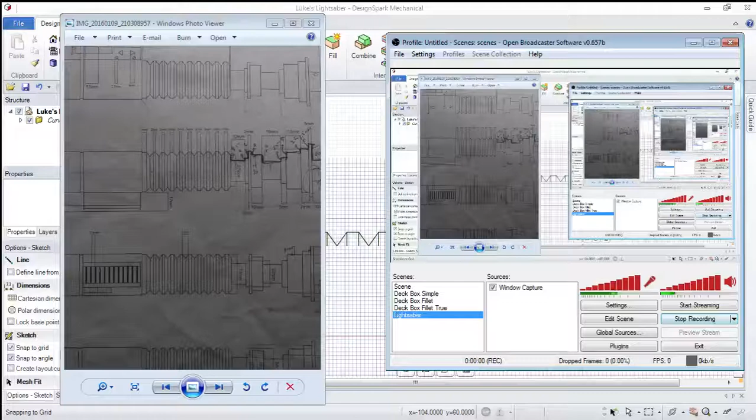Specifically Luke Skywalker's lightsaber from Return of the Jedi. I found the tech specs for several of the lightsabers from the movies. Luke's and Obi-Wan's were very symmetrical, so they're actually pretty straightforward. They look a little complicated, but we're actually going to nail this pretty easy.

I've gone ahead and started sketching it to save some time, but let me explain how we started this guy. So we took one of our cross sections here, and I cut it in half along the mid plane, all the way through, and then I started sketching the silhouette of it across where it is.

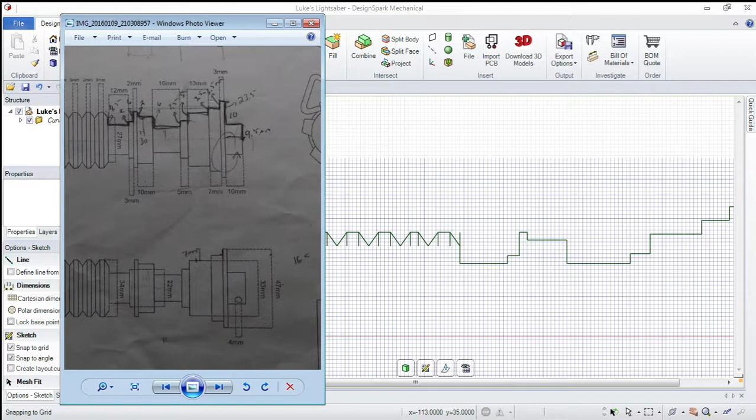So I had to start by looking up all the dimensions. You have to read a tech spec, or the technical specifications of one of these documents, and you're going to have to be able to look at where your dimensions are and be able to manipulate them as you need to replicate them in a thing, if you're doing your own project or want to adapt to one of the other ones.

So these are all in diameters, so I had to go ahead and cut them in half to get to radii, because we're dealing with radii here. And then I was subtracting radii from each other to get the differences here to go up.

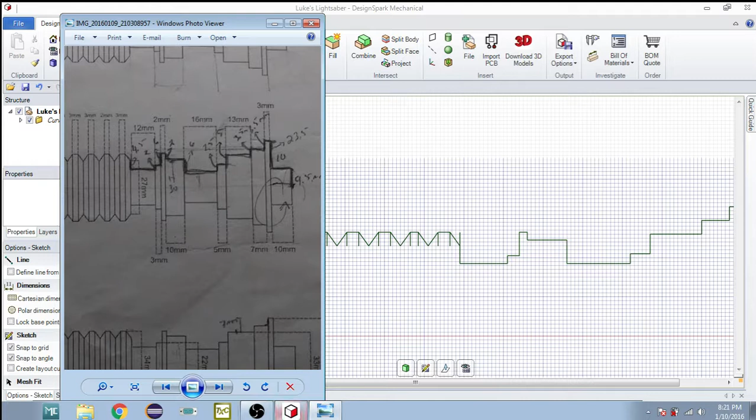All right, so I started down here, went 9.5 up, over 23.5 over, and kept going. And then I got to these guys.

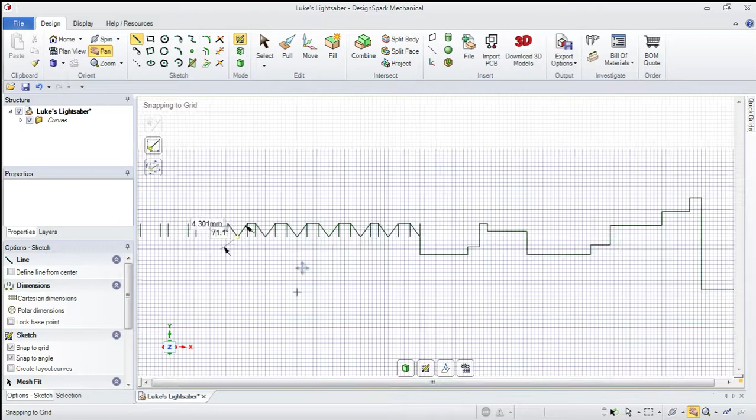These guys took a special little trick that I figured I'd show you while I was doing it, because this is the ribbed part here. I know that each little bar here oscillates between 3 and 2, and it changes as it goes. It's not very consistent, so you'll have to pay attention to that as you're going.

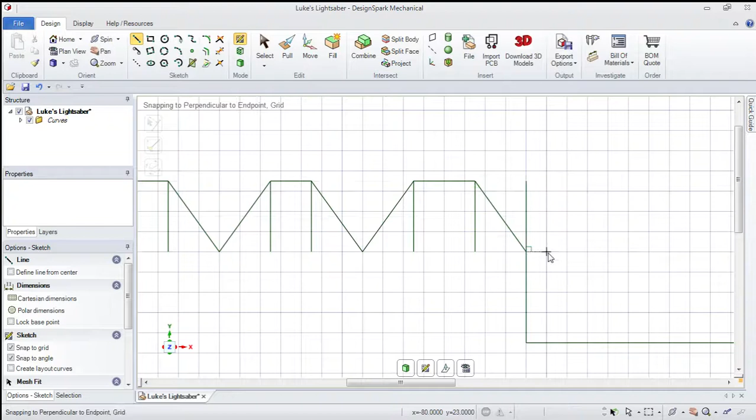So these triangle pieces here are 5 millimeters across total, and then I went and bisected them for the dip. So this first piece was 4.5 millimeters, and then this piece was 3.5, because the height of the ribbed gap here is 3.5 millimeters, and then 2.5 over. So 2.5 times 2 is 5, which is why I have the distance here.

So what I did was draw this guy first, and I offset him the distances, and then connected the dots. I offset him first 2.5 for the distance of only half a triangle, then 3 for the width of the first guy, because that's what he is. 3, and then 2, then 3, 3, 3, 2, 3, 2, 2.

So I then offset this guy 5, and then 2, 5, 3, 5, 3, 5, 3, and so on, all the way to the end here. And then I was connecting the dots as I went. Or sorry, I connected them after I finished the offsets.

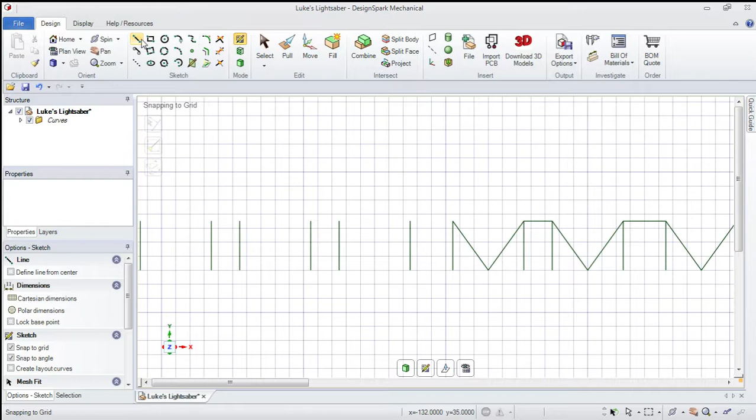So now I'm going to keep doing this. So 3, go down to the middle here, then I'll keep going. I will say that the whole lightsaber model is about a foot long, which is actually too long for our printer.

So there's actually, if you want a full scale, you'll have to cut them in a certain way to get it to fit on the printer, the printing bed, which is fine. I designed it a certain way for quick access, to do it, and I'll show you at the end.

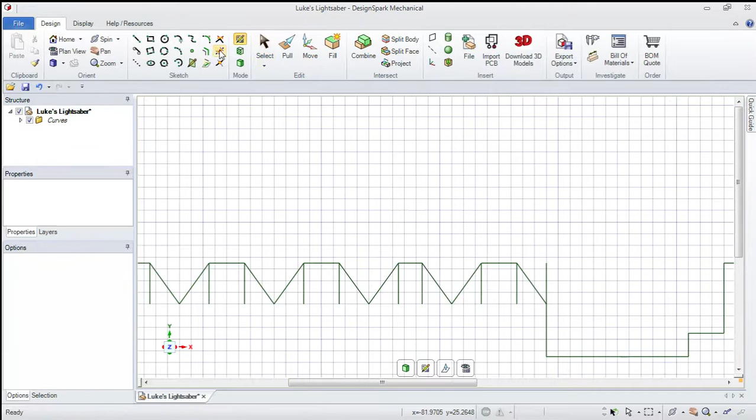So let's go ahead and use the trim function here to clean up, okay? Then we'll just go through and mop up all my little guidelines that I was using.

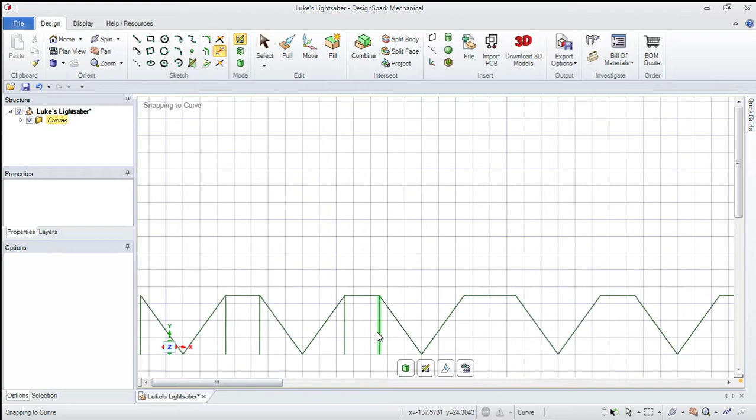Yeah, and because it's such a big print, it does take about 16 hours and about 40 minutes, I believe, to print off a lightsaber on the lowest quality setting of our printer. So I would suggest doing a scaled down one if you want a higher quality, more reasonable print.

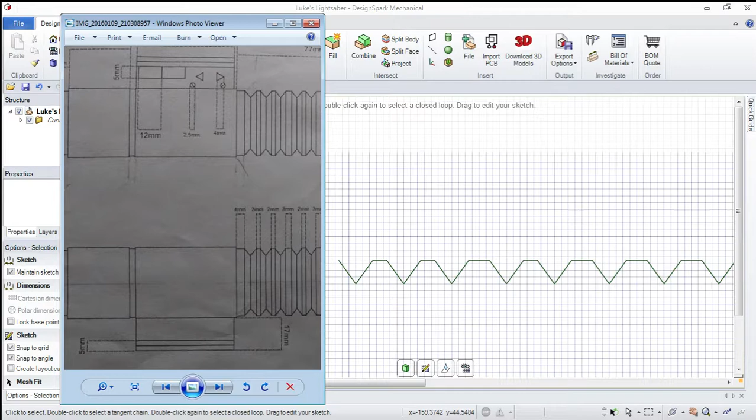Okay, now I'm bringing up our schematics here. I actually have, I've used them, you can't see them up here, but it's in one of my hands. This width here is 51 millimeters, and there's a little 2 millimeter gap for the button that goes up. And then, yeah, so let's start doing that.

So this first little piece here, though, is 4. Nope, it is 12. And then we're going to go up 4.5 millimeters. Then we go over 51. It's going to give us a good gap here. Then we're going to go down 0.5 millimeters. Go over 3 millimeters. Go back up 0.5. Go over, I believe, 31. Yep.

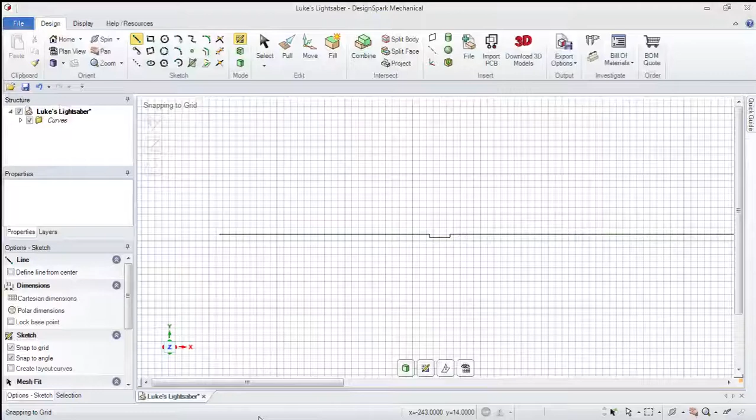If you're one of my viewers and you don't have one of these in front of you, I'm really hoping you can just pause to follow along with these schematics as we're going.

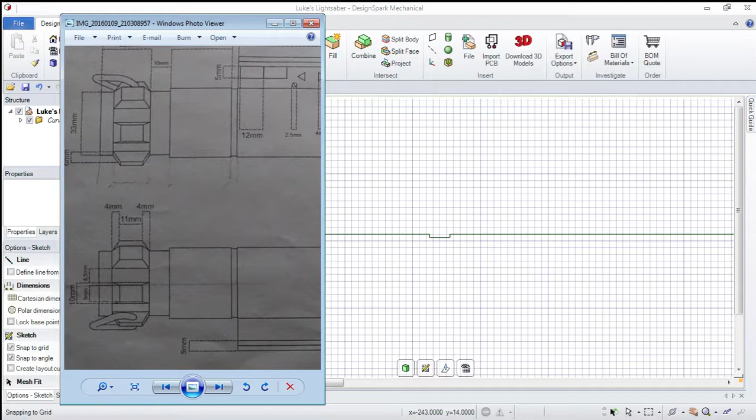So I've done 51, 3, 31. This guy here has the cool little trapezoid parts. I'm going to do the full width of the guy, which is 35 millimeters. Well, it's 25 for this piece and then 35 for that guy. So let's go ahead and do that.

So this goes down 1.5, and then over 35. Now we're going to go all the way down here, and then connect our guy. Now we have a full cross-sectional cut silhouette of our lightsaber guy.

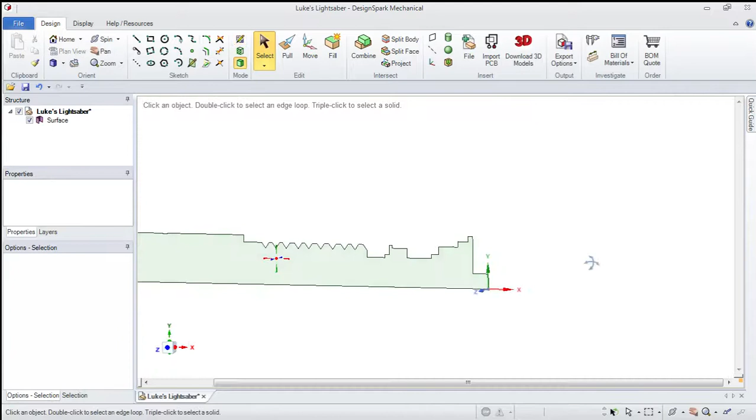Alright, now for the fun part. This is just a trick for really symmetrical things, where I can now enter 3D mode, take this surface, hit pull, and we're going to use a cool little function here called revolve around an axis. So we're going to revolve around axis, and then it has this little arrow guy pop on our thing, so we have to select an axis.

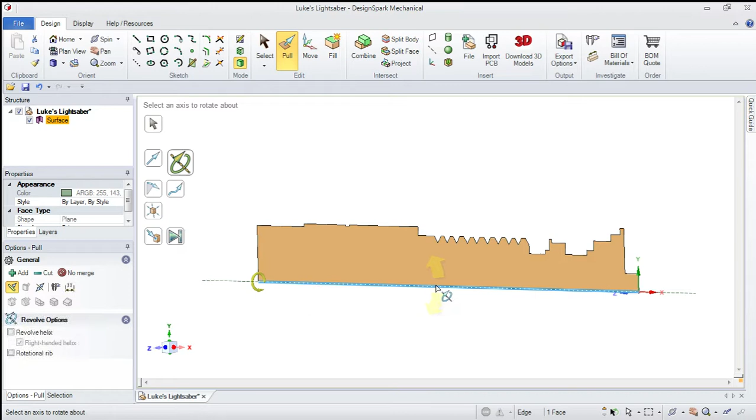I'm going to select this, the x-axis, because it happens to be our bisecting dude there. Select that guy. And then we're going to hit this guy and watch it happen. Full pull, which is going to revolve the whole thing in a full complete circle, 360 degrees. And we watch all the cool stuff happen.

Now we have a lightsaber, minus some of the fancy pieces. Let's go ahead and add some fancy pieces now. Let's do those trapezoid parts. So let me orient myself here.

Let's put a plane here. So I hit this plane, and then just kind of put it on the surface here. It doesn't particularly matter how you get it oriented, as long as we get it looking alright.

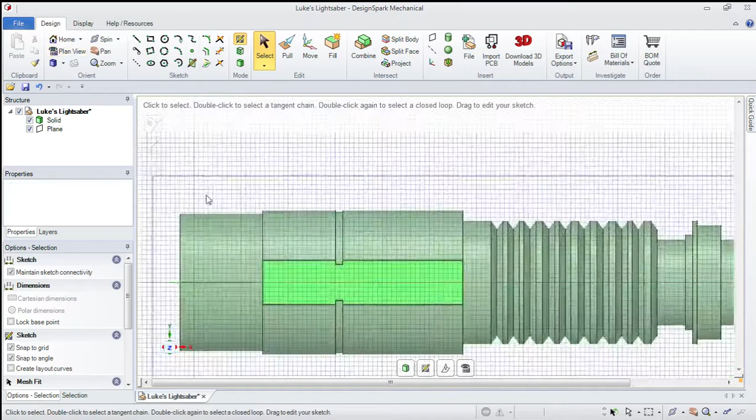So this plane cut off the part that goes above our plane so we can see where we are, which conveniently allows me to take the offset function here. And I'm going to control click both of them so they're both highlighted, so it lets me offset the whole guy. Remember, there was a distance of 10 millimeters before the trapezoid part started, and the trapezoid part itself is 19,

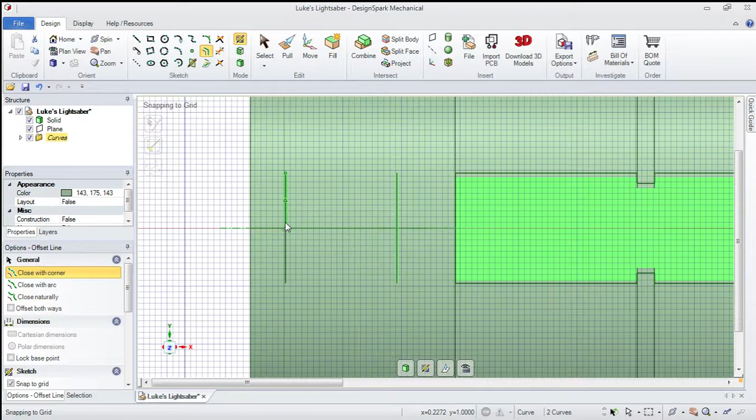hold on, make sure we select just this guy, 19 millimeters, and then there should be 6 right here. So now we've got the range of the length of our trapezoid.

Now I need the width, which is, if I look at my schematics, 10 millimeters. To do this, I'm going to take the offset, take the middle guy, and go up 5 on either side. So I took 10, divided it in half, and put it on both sides.

Okay, then we'll take trim, this guy here, and tidy this guy up. If I can click on them, get these guys. This line is going to stay there. It's a point of contact, so it's not going to go away.

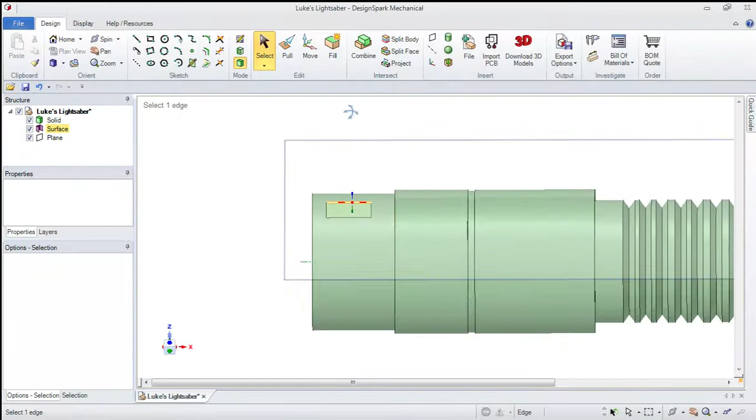Alright, it's not a trapezoid yet, so we gotta work on that. So let's go ahead and pull him up into a rectangular prism here for 6 millimeters.

Alright, now we're going to do a fancy pull function here on the edges. So if you click all these edges on the top here, and then click our pivot edge over here, this is going to allow us to shrink this top piece. Probably can't see very well, but the arrow pointing down there is highlighted, which means it would pivot along this plane, which just means it's going to slide up and down, which isn't useful to us.

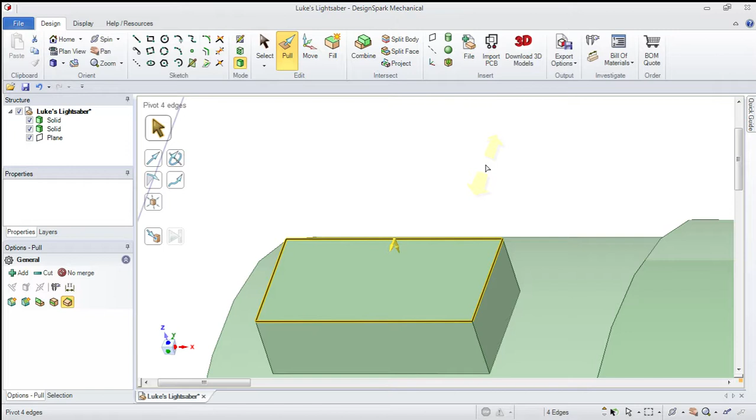So we're going to hit tab to highlight the next arrow, so it's going to pivot inside, internal. And I'm just going to type in 2 millimeters, because I was messing around earlier and I thought that looked cool. Alright.

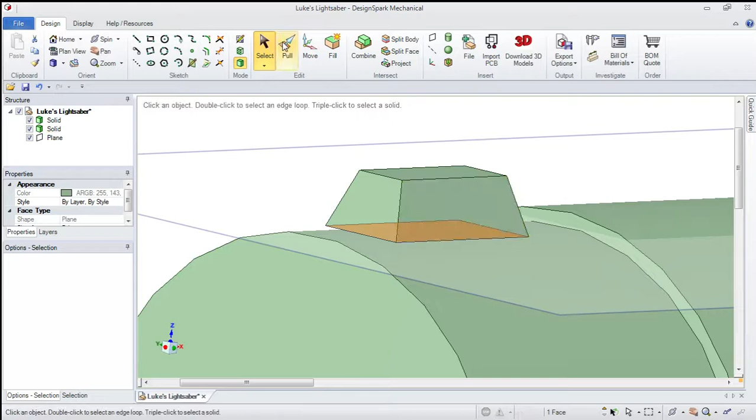And let's go ahead and orient ourselves. And I want to get this guy in here. So I've selected that surface. I'm going to use the pull function, and I'm going to go ahead and pull him down into there. Okay.

Now he's been pulled down to the surface here, and he's a full guy. So that was the pull. I could have done a pull up to surface, except because it was just barely in contact, it was going to give me like an error message. So you can just do it manually and drag it in. He has served his purpose. I don't need him anymore.

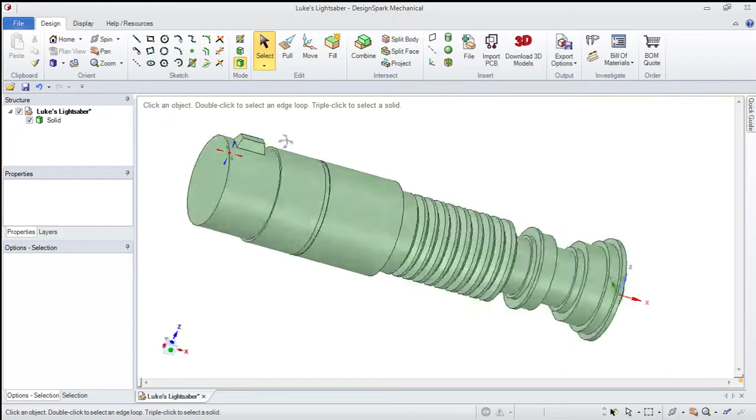So now I'm going to show you another cool little trick called patterning. We're going to use patterns to replicate this guy along the pommel of our lightsaber. So I am going to come in. Actually, I'm going to plan view here just so I can orient myself. Okay.

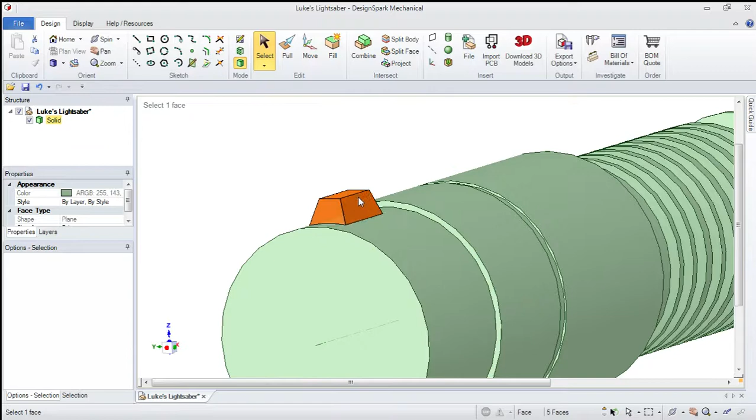So I'm going to take select, press escape a few times if needed, or just click and drag to select that component, that little solid piece. We're going to then hit move.

Now we need to check the create patterns button down here, so it knows that as I rotate this, make copies of it. But first I have to move the rotational piece down here. Now I rotate, and then I can make it.

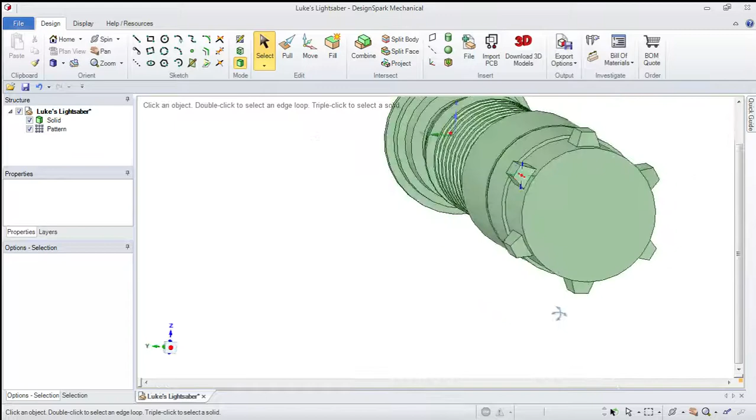It takes the angle I've rotated it to and infers how many copies I want. If I hit like 270 or something, it goes to 3 or 4, but we want 6, so let's get closer. 7, 6 - because on the schematics I counted 6. Now we have some fancy trapezoidal prisms on our pommel.

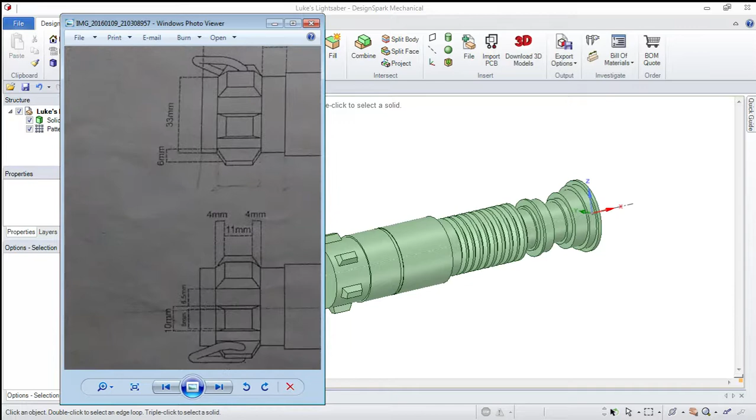Alright, it's starting to look good. Checking back to our text here, looks like we have a 4mm piece. However, it doesn't look like it extrudes out at all, so it's probably a little indent, which is fine. Plan view, I'm going to zoom in, grab circle, hit the origin here, and it's going to come out 4mm.

I'm going to hit pull, which automatically puts me into 3D mode. I'm going to get this surface, and it didn't give me any real clue as to how far that went in. It could have just been a different piece of alloy in the pommel. So just to give the illusion that something useful is there, we're going to go in, I guess 2mm. Let me look here. I don't want it to come out though, I want it to go in.

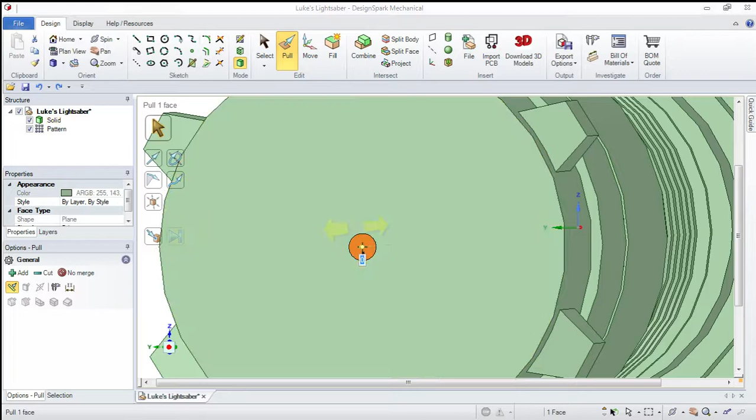So I'm going to go minus 2mm. There we go, now it just looks like a little added feature. There's a similar hole over here. Looking at my schematic, right here, 4mm also. Not quite specific on where I placed it, so we'll just put it not quite halfway.

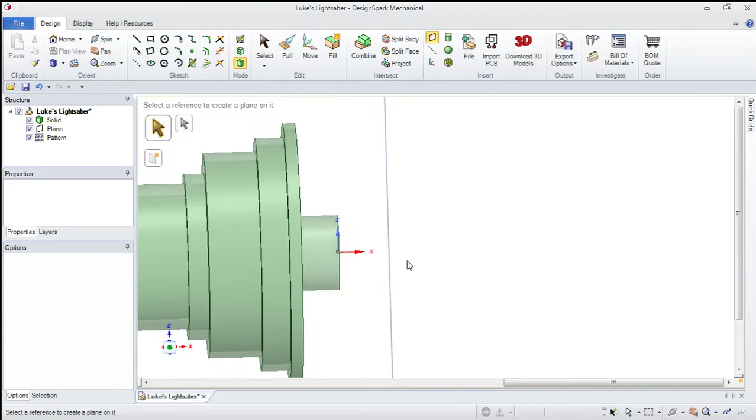So I'm just going to click plane here, and as you slide your mouse along it's going to orient this plane where we want it. I'm just going to pick it right about - no, I don't want to do that. Plane, and I'll click here. If I click the axis it goes into the middle, and I want it on the surface, so I can enter sketch mode on it. There we go, so now that line's the point of contact.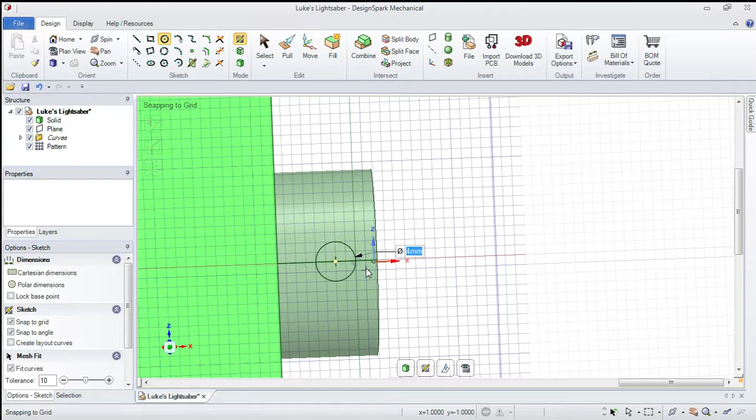I'm going to draw a circle. Remember it wasn't at the center, it was a little up, so let's try here at 4 and see what it looks like. Checking schematic, that looks a little big. No, that looks right, and that actually went all the way through. So we may actually do something. Yep, so I would hit 3D mode again.

Get rid of this plane, we don't need it anymore. And take this, pull, make sure cut is selected, get rid of this guy. And I'm going to pull it to about the center, so about 10. It didn't feel like cutting, did it? Make sure cut is selected. Doesn't want to cut. Alright.

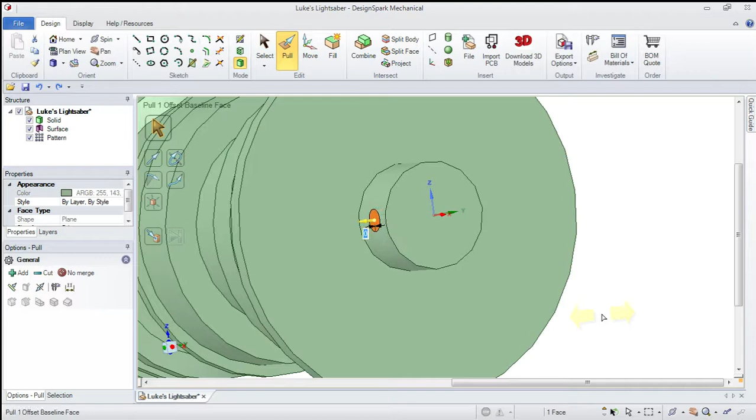Next plan, so we'll come back to this in a second. We now need a button actually, so let me check here. We need it to be 19 millimeters wide by 49 millimeters long along the top of this guy.

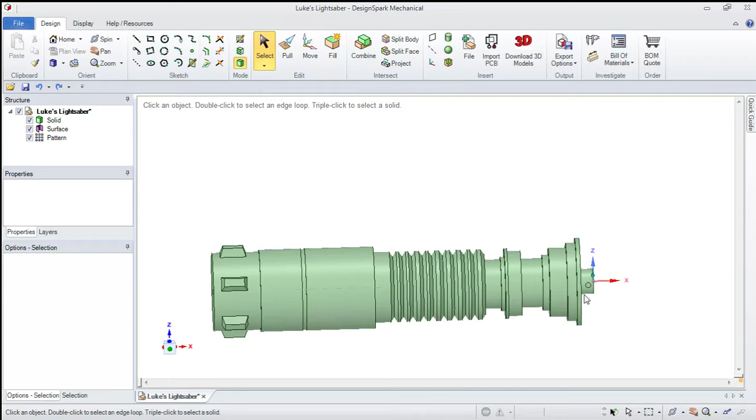So let's go ahead and create a plane about here, and enter sketch mode on the plane. Plan view. We know we're going to use offset. Hit this middle guy - let's see, what, 19 wide, so 9.5. I cut it in half, millimeters on the top and 9.5 on the bottom. Gives us the width of our guy.

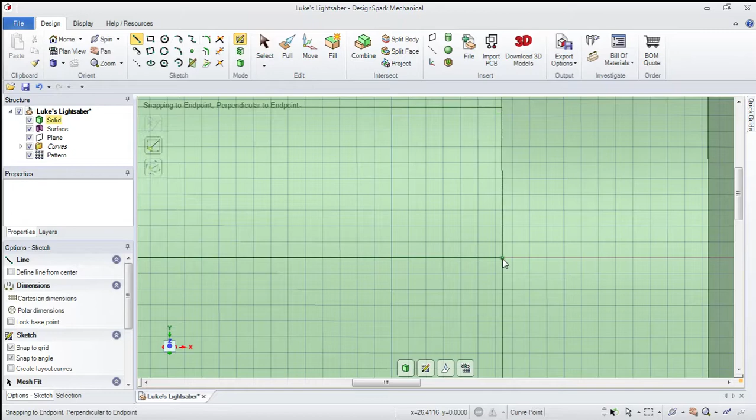This doesn't give me a line, does it? But I can take this guy and make one. Actually, I can take this guy and make one, and then I'm going to offset that by 2. Because, and you can't see it here, but there's 2 millimeters before the button starts. Okay, alright, got a fancy.

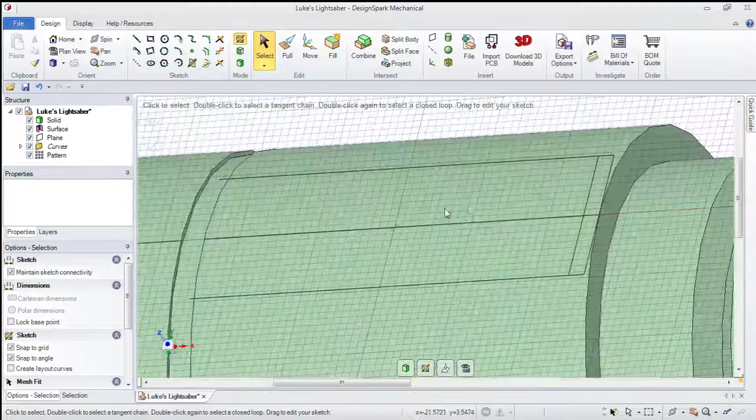Let's go ahead and actually trim, get rid of these guys. Oops, actually, yeah, we need a line here to connect the ends there. Now under 3D mode, we got a button. Pull them - well, we got a surface of a rectangle. Pull them up a height. We need the height of our button, so let's go ahead and check our schematics.

How tall is this guy? 17 millimeters. Oh sorry, right here. So we're going up 17 millimeters.

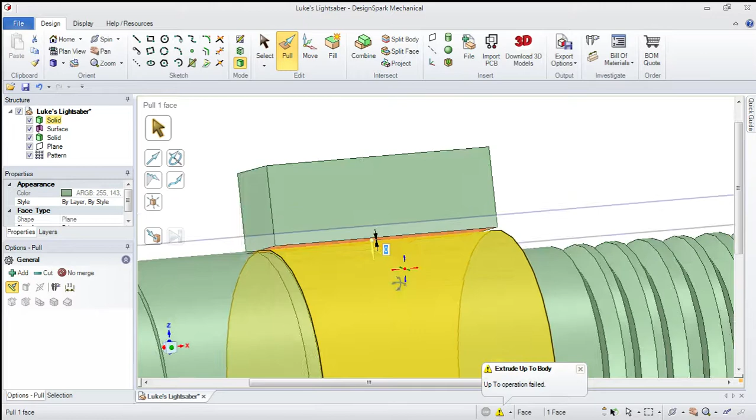Alright, it's still its own solid, so we're going to actually hit this surface, hit pull. If you did a pull up to, in a perfect world it would work, and you click the surface, it would extrude all the way down into the surface. It likes to give me these errors because it's a barely piece of point of contact there. If it was just above, it would work just fine. I'm going to pull it down manually and just drag it down until it hits contact. Now it's all part of one solid.

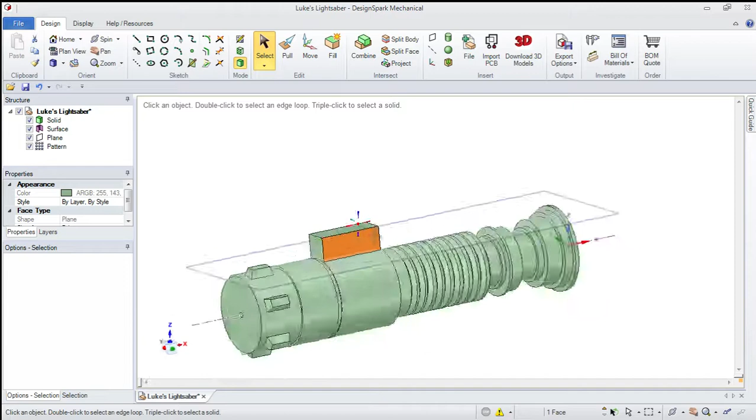If you triple click 1, 2, 3, it'll select the entire solid. Double click usually selects the piece. Alright, now we got a piece of a button. Cool. Now let's think here.

When you're building or designing things in your CAD, you want to think about how the printer prints, because that's going to constrain how you do this. The printer cannot print in thin air. So depending on how you angle this guy, it's going to have trouble printing things. Well, it's not really going to have trouble, it's going to build a bunch of supports, which uses plastic to get up there, so it has a scaffold to print on.

So I'm looking at the schematics here, and it looks like our button has a lip here that kind of comes off, which is fine. It's cool.

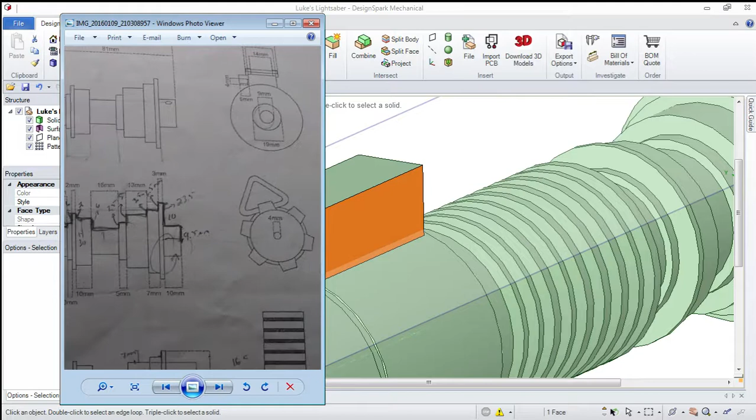The printer's going to try to print supports up here because it can't print off the edge like that. It can bridge gaps, but it's going to fail and mess up if it tries to print off the edge like that without a support. So we're going to live with it.

All right. So I mean, I personally, if it was my lightsaber, wouldn't even do that. I would just leave it as a little button. But some of you want the full thing. Okay.

Looking at our guy here, we have the width of that guy, which I had determined to be 2.5 millimeters. Let's go ahead and offset him by 2.5 millimeters.

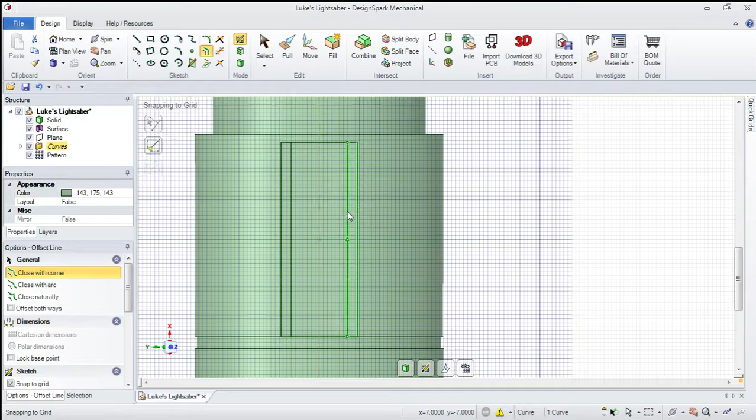And now I'm going to offset the internal guy, who also happens to be 2.5 millimeters, and then 1 millimeter for the gap. This is going to create that internal ribbed piece. 2.5.

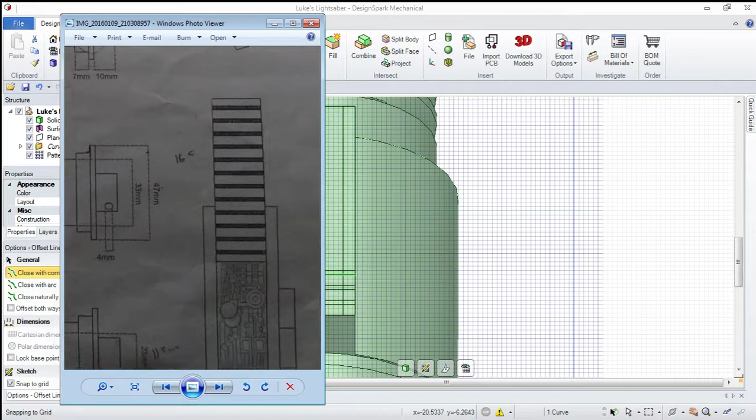You could, we have the capacity to make this thing slide in and out. If you guys would like to see that, go ahead and let me know in the comments, and I'll make a separate video how to amend the button to have this as a sliding piece, and then we can go ahead

and mess around and make all the little tiny internal pieces here. They're just rectangles and circles. It's fairly straightforward, although there's obviously no dimensions for it, so we'd be winging the whole thing, which is fine. We'd still make it look cool. 2.5, 1, 2.5.

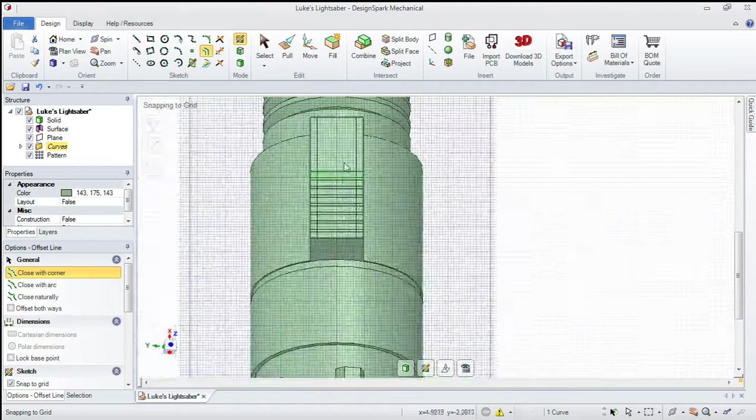I feel like there's probably an easier way to do this, but it currently eludes me. 2.5. And then we're going to embed these little gaps down about 2 millimeters, to give the appearance of the ribbed piece.

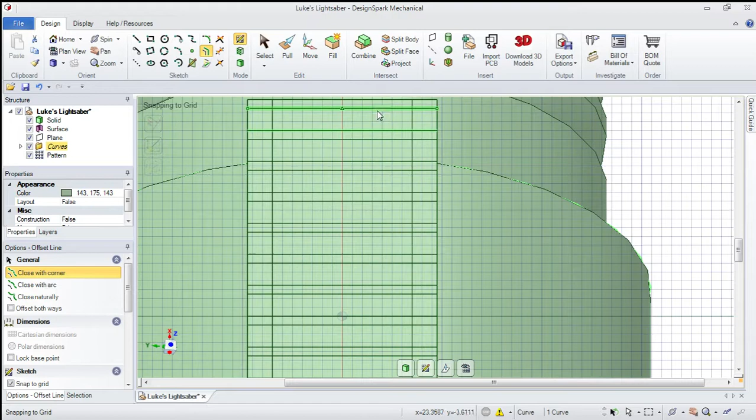Alright. Yeah, it ends as an edge, but I don't mind. I think I'll just have an extra wide piece here, and I'm just going to offset this guy by 1.5, I guess, just to make it a little less obvious that it's a bigger piece.

We got a bunch of pieces in there. I should have cut that first. Trim, trim, trim. Clean these guys up.

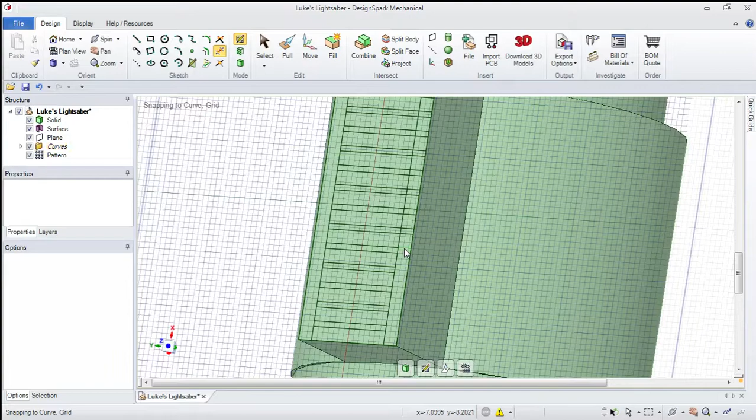Then after this we have to make the... I'll show you guys how to do the overhang for this button piece, and then we'll go into cutting it and getting it ready for a print.

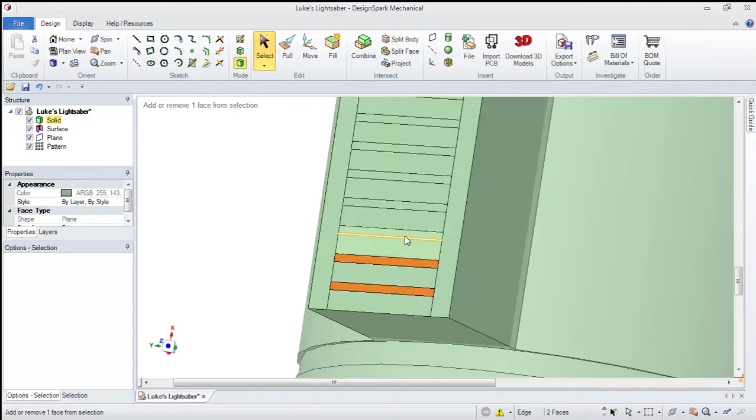Okay, I'm going to go ahead and select 3D mode first. Then I'm going to select these little surfaces in here, not the edges but the surfaces. Scroll up, hit these guys.

Pull them. Arrows went up, so I'm going to go negative 2 down. That made them pretty deep, but I'm going to make these guys go down 1 millimeter, so it gives our other piece the illusion of, so pull -1. It goes down 1. Now we have a fancy ribbed piece for our button.

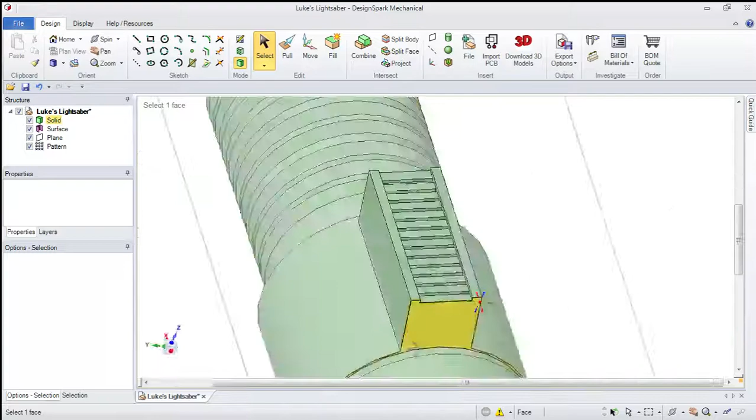Let's go ahead and enter sketch mode on the side here. Plan view, in, offset, this guy down 2.5, and 2.5, because right here is where that little overhang came from. 3D mode. This guy's gonna pull out 1 millimeter, and this guy's 1.5.

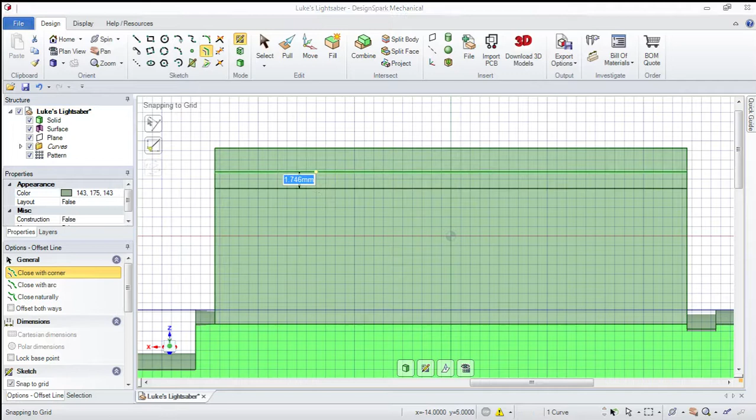Okay, sketch mode, plan view. Offset down 2.5. 2.5. 3D mode. Pull 1. Pull 1.5.

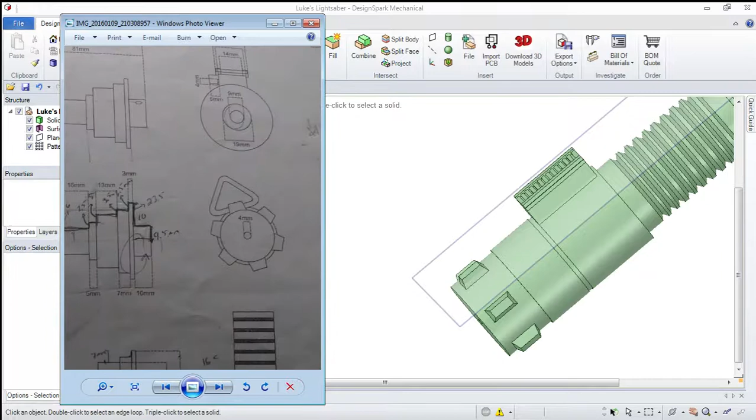Alright, the button also has another piece that overhangs here. Let's figure out how big that guy is. It is 6 by 4. It looks like it has a small gap inside, which is cool. I actually should have done something before I did that.

I'm going to enter sketch mode on this guy. Wait a minute. This is just below it. Goes down 4. There's a piece here. There we go. Whatever, sketch mode on this dude.

Plan view. What was the width of that thing? Did it give us the width? It did up here, didn't it? 12 millimeters, and there's 2 of them, so 24 total.

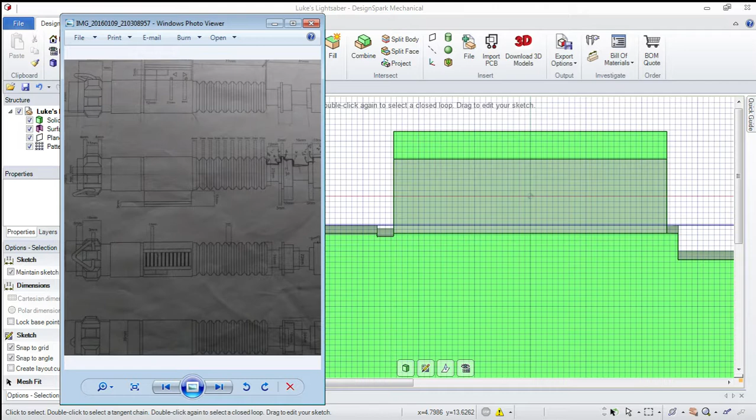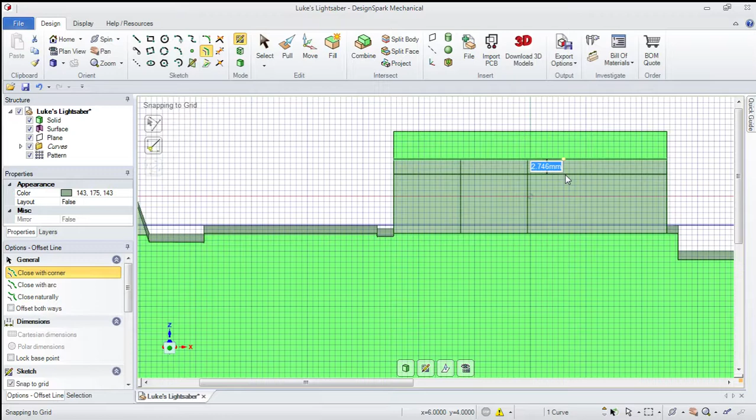So, offset this guy, 12, 12, it does say 4, but it has a piece. It's gonna pull out 6, I can tell that. Oh, 5, down, sorry, 5. I found it, this guy over here.

And let's do some trims. Trims. 3D mode. I'm gonna pull both, but it's gonna get rid of that line. I'll recreate it. I'm just gonna go to 6. Remember, it's going to print supports for this. We'll just have to live with that.

Now let's go ahead and enter sketch mode on this piece. Plan view. Looking back at the pieces here. Looks like there's like 1 millimeter that comes in, and like 2 down. But it has to be a 1 down actually. Oh, it can't be 1, it has to be 2.

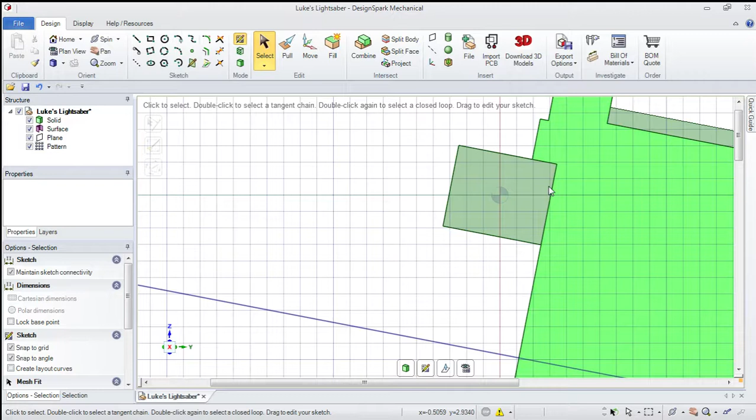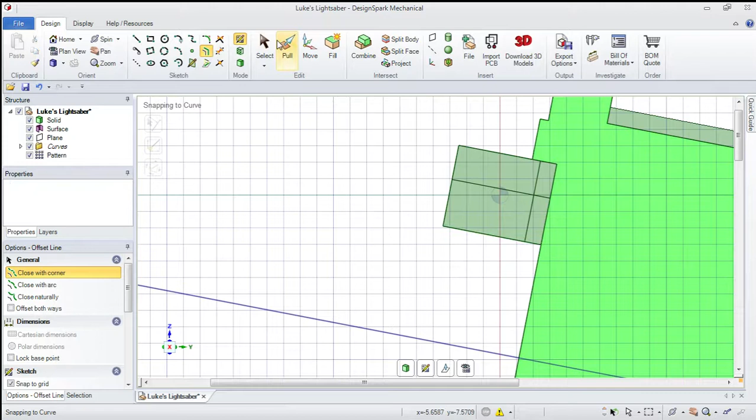Let's offset this guy out 1, and you up. There, that was 2.87, I think, on my thing. I want to use trim to get rid of this piece. I'm then going to take 3D mode, take this guy, pull. I want to cut. Make sure, just cut selected, get rid of that dimension restrainer.

And we're going to pull this guy all the way through to cut a hole into our piece here. There you go. Now, there's a line there, but it's just a line, which it's not going to mean anything to our printer, so we'll have to make something there, even if it's just like a little 0.5 gap guy.

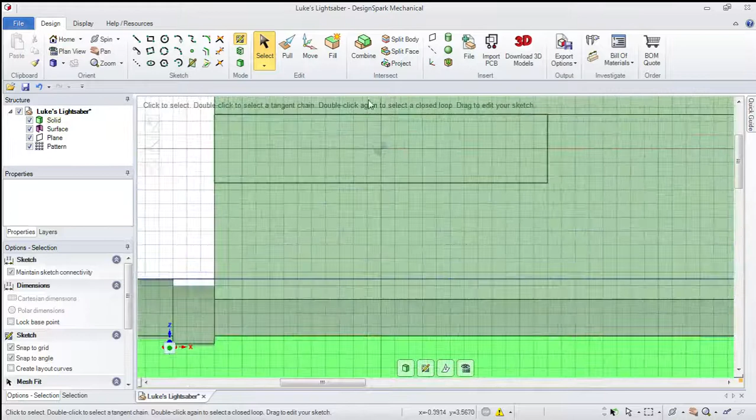So let's go ahead and offset this guy in 12. I'm going to offset this guy by 0.25. 0.25. That's a bit of a big guy, but, and I'll delete this middle line. 3D mode. Pull this guy, cut, undo that guy. Pull in.

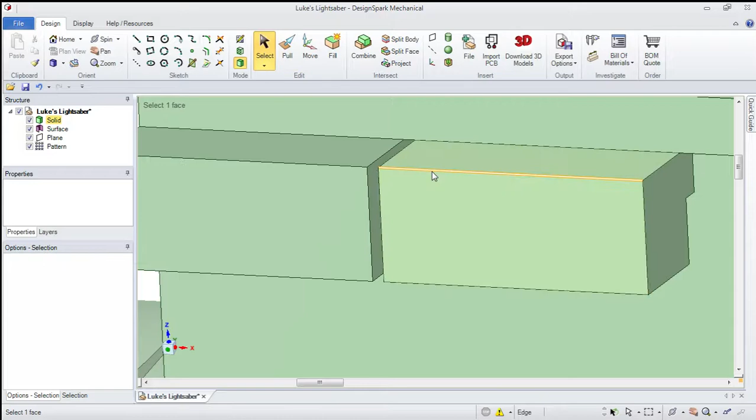Oh, actually, Control C. I'm going to pull it, but arrow's pointing outwards, so I'm going to go negative. And I know that they came out 6, so I'm just going to negative 6. That takes me straight flush against that guy.

Alright, I got a button with some pieces on it. Now we got to cut this guy for printing. Let's go ahead and get rid of the plane here. Let's go ahead and...

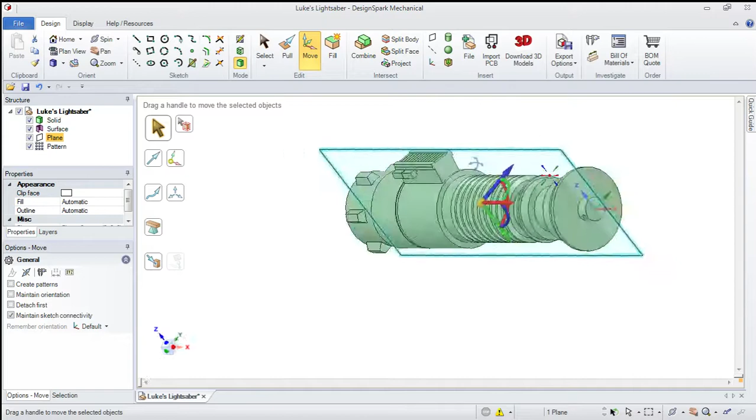When you move things, you click on either the axis that you're going to move it in, or the angle you're going to rotate it in. I'm just rotating my plane to about here. Wait a minute.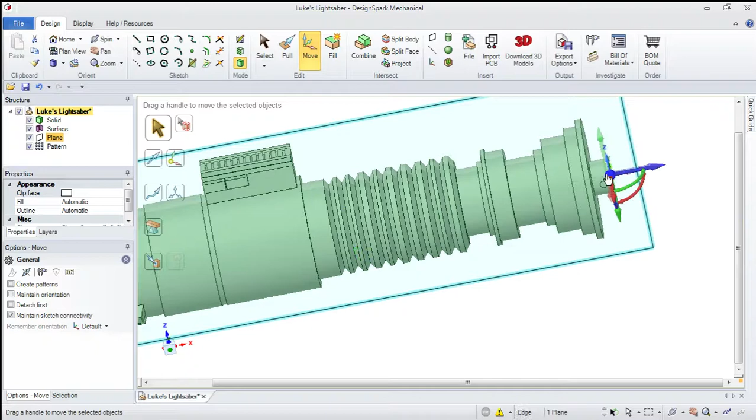That wasn't the plane I wanted. Plane on the x-axis, and if I move this guy, it creates an auto pivot not on my axis. So I'm going to take this guy and manually stick him on my axis here. Oh, darn it, I accidentally pressed escape. Let's try that again. Move, select the plane, it's going to go here, and I'm going to move it to here, the axis, so that when I rotate it, it rotates about the axis.

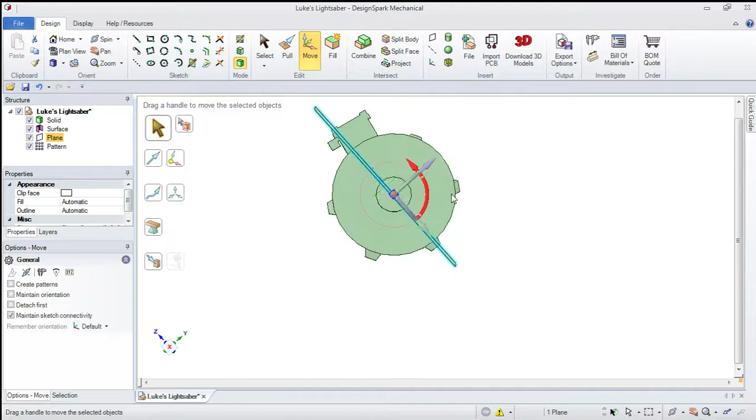Shows an interesting skew there for some reason. And I want to manually rotate this guy to be about here, so that when this guy prints, as much is on top as possible.

Yep, now that that's rotated, I am going to use a split body command here. You're going to select the solid you're going to cut into pieces, and you're going to select the plane you're going to cut it at. That cuts it. Okay, and these are two separate solids.

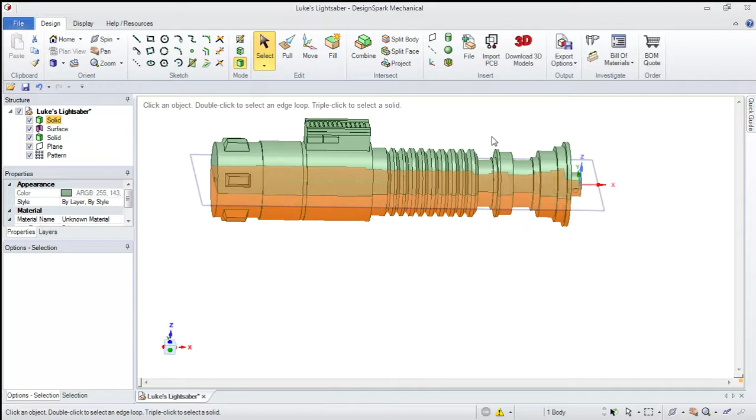So, whoops, if I triple click, it selects half of that guy. I want to go ahead and move that guy. Click on this arrow because I'm moving him up or down. Arrow's pointing up, trying to go negative 25 millimeters, and that moves it down. So now I have a cut in half piece.

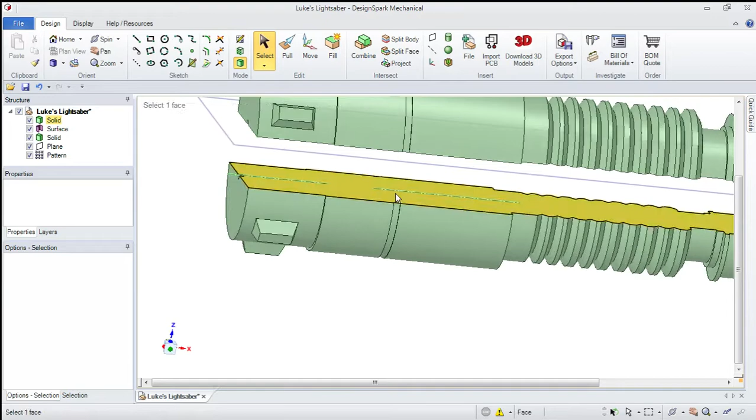Now, I personally do not want to print an entire thing of plastic, so I'm going to take... I just realized I made a little mistake there. Well, I made a mistake there. I'll remake him in a moment. I'm going to shell these internal guys to about 3 millimeters.

Shell to 3. That'll show you there's a thick enough wall on the insides of those.

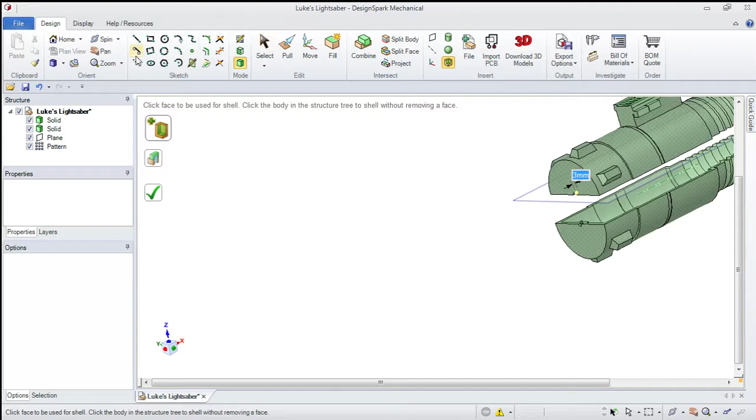I can actually cut that off if I wanted to make a hole straight in. You could do that by hitting the surface and then pulling through would cut, but I kind of like it, so I'm going to leave it there. I'm going to pan over here, and let's go ahead and make the little hole that we had a moment ago.

So let's go ahead and make a plane. Let's do it about there. Click on it, enter sketch mode, plan view, orient yourself. I'm going to go ahead and circle, hit this, not the center, so that guy, 4 millimeters.

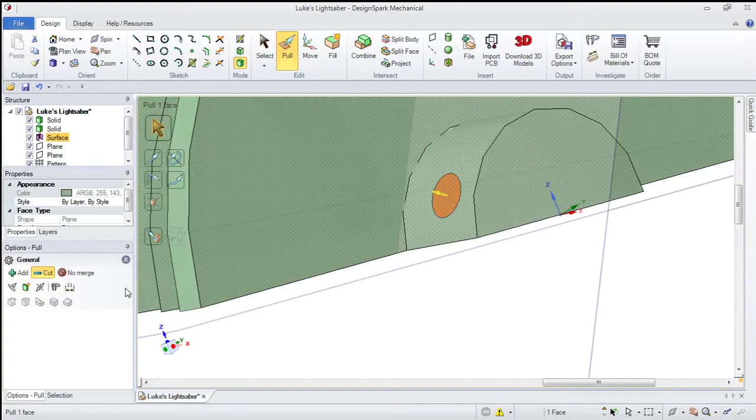3D mode, hit this guy, hit pull, hit cut, undo that dimension constraint, and now I'm just going to angle myself, and then I'm going to pull it in through so it cuts a hole. It doesn't want to cut a hole, does it?

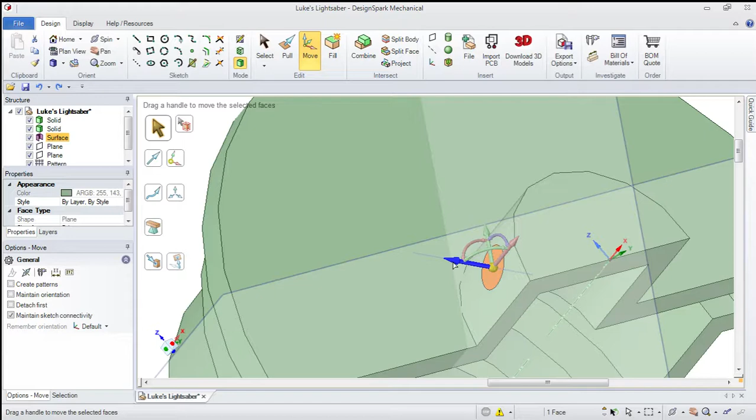Let's see why it's doing that. Maybe it's that point of contact thing again. I'm going to take this guy and move him this way just a millimeter. I don't need you anymore, or you. Take you, pull, cut, undo. Pull it through.

It's not in a cooperative mood. I'll live without it for now, I suppose.

Actually, I'm determined now. Plane. We'll go ahead and move him out. Maybe it's because we made him on a surface.

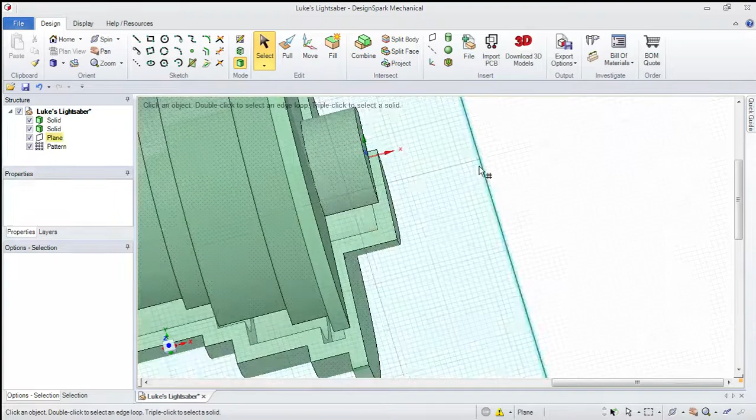Sketch mode. Circle. Here. 4. Pull.

Well, that'll be weird, wouldn't it? I'm going to just hit the surface. Oh, that makes it bigger. I want it bigger.

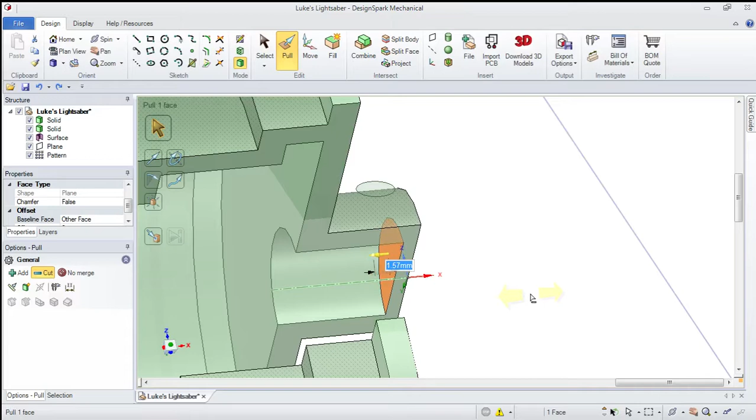Also make sure he's cut. And let's just really hope it wants to cooperate now. Cut. It's just determined, I guess. We'll just have to live with that little guy.

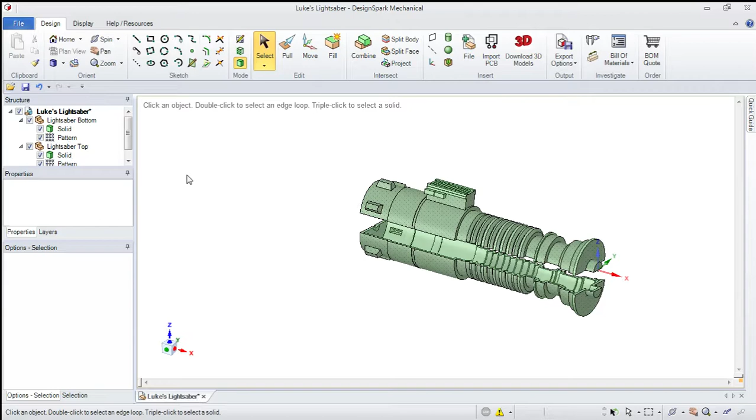Orient. Get rid of this guy. Get rid of this guy. Now we need to get him to print, so let's go ahead and do what we've done before. This is the bottom. Move to new component. Rename the component. I'm going to name it to lightsaber bottom. Enter. And this top guy, rename, move to new component, rename it to lightsaber top. Okay. Now when I click on these guys, they're separate components of the assembly of Luke's lightsaber.

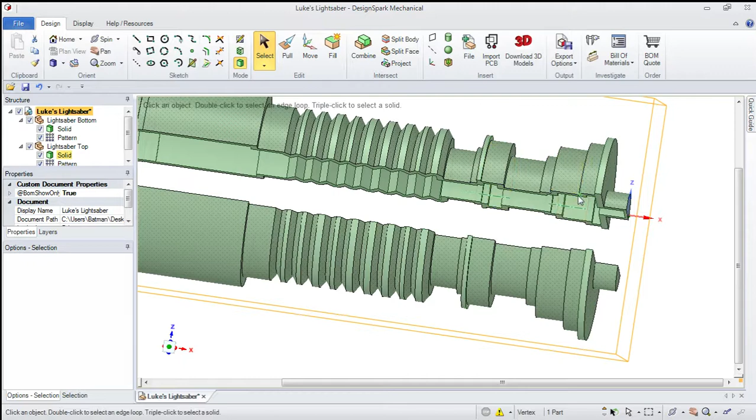Again, this is about a foot long, so it won't actually fit on our printer bed. In the past I've cut it at this plane here, and then elongated an internal piece that went in here, so that it printed these two pieces that you would then glue together and slide in and glue that.

For a full guy, I'm going to encourage you guys to scale these down, which we can do if we were to go to MatterControl. First we have to convert those guys to STL files. So let's save those two to desktop. Oops, that was a lightsaber that's already opened.

Oh wait, we skipped a step actually. Source, convert to external. Source, convert to external. Now we can do that. Lightsaber bottom, lightsaber top.

File, save as, lightsaber top, STL. Remember, STL is what our printer reads in. Lightsaber bottom. File, save as, STL.

Now we got these guys, so let's go ahead — I was messing around with stuff earlier. Remove. Oh yeah, our printer or our design can't do text, so you'll have to do text in this program. We're going to add the desktop.